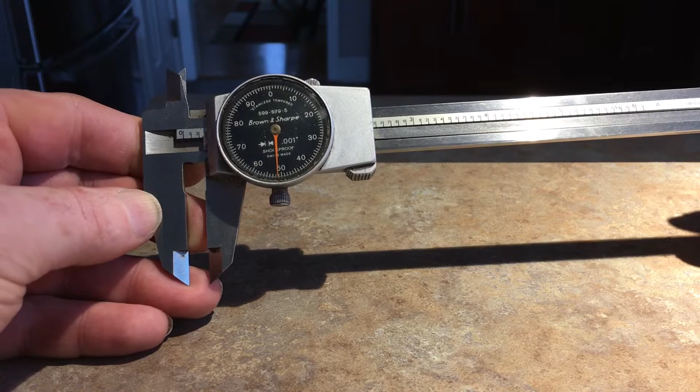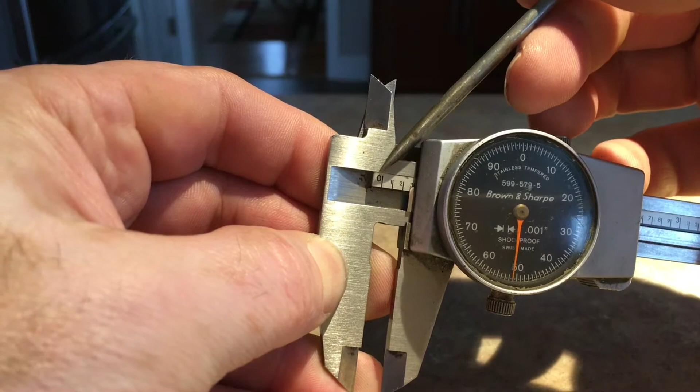This is known as a set of dial calipers, or also known as verniers. This is actually known as zero, and I'll point that out, starting at 0 all the way to 6 inches. And that's right there.

So I'm gonna open these up. They're kind of like a tape measure. There's your 1-inch mark, 2-inch mark, 3, 4-inch mark, 5, and 6.

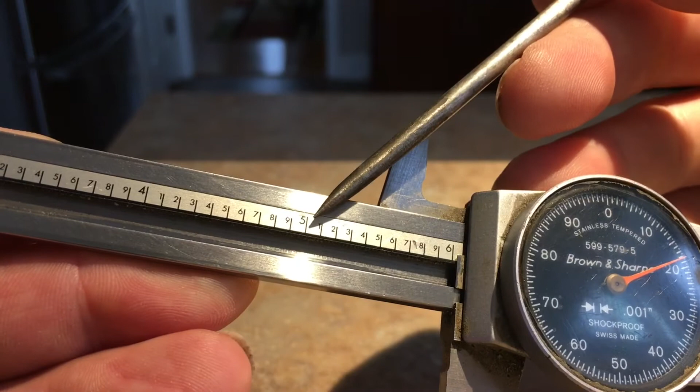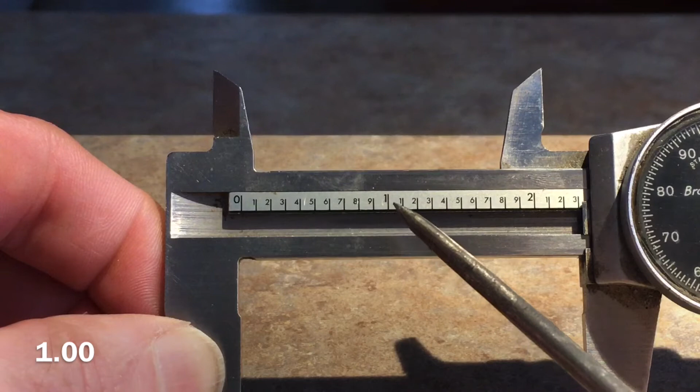The lines in between those are your 100-thousandths marks. So let me zoom in here. Starting from 0, that's 0.100, 0.200, 0.3, and so forth all the way. And then when you get to 1 inch, now you're at 1.0. So now when we go up here, we are at 1.1 inch, 1.2 inch, 1.3, and we keep going.

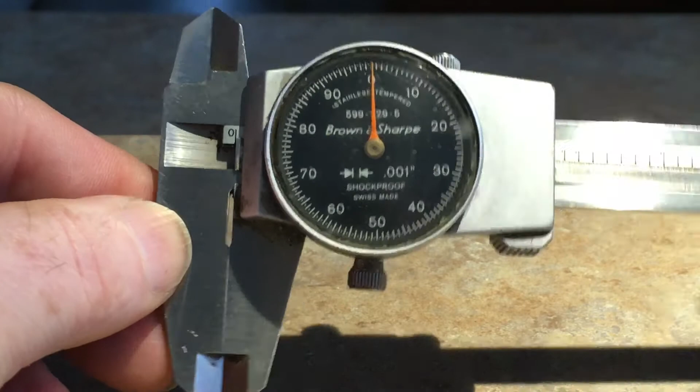This would be 2 inches, so 2.0, 2.1, 2.2, 2.3, and it just keeps going on. So what this means is when this is down to 0, well essentially you're not measuring nothing, it's just bottomed out. And every rotation of this dial is 100 thousandths.

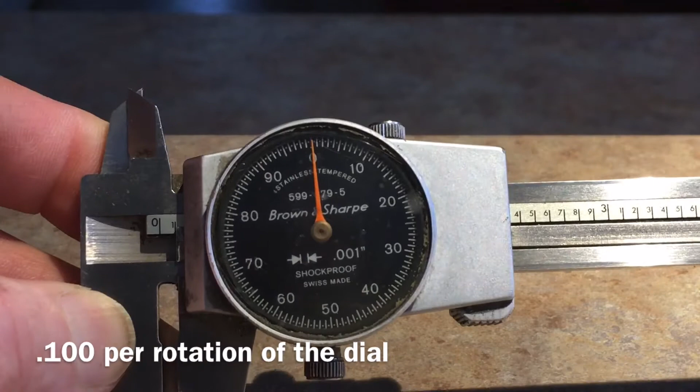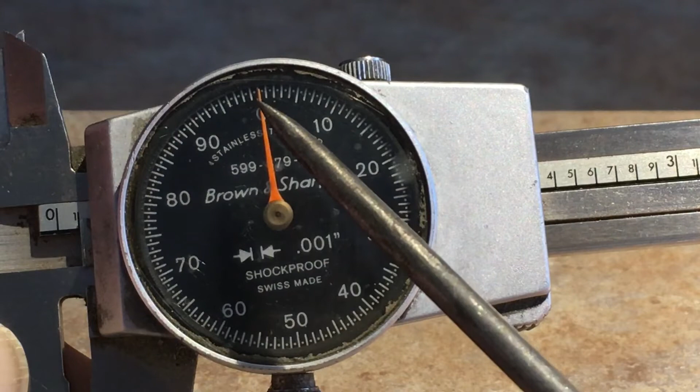Let me zoom in here. Each line that you see is 1 thousandths. So there's your first 10 lines, and then 20, 30, 40, 50, and all the way around. There's 99, and then it just starts over again. That would technically be a full 100, but you're starting over.

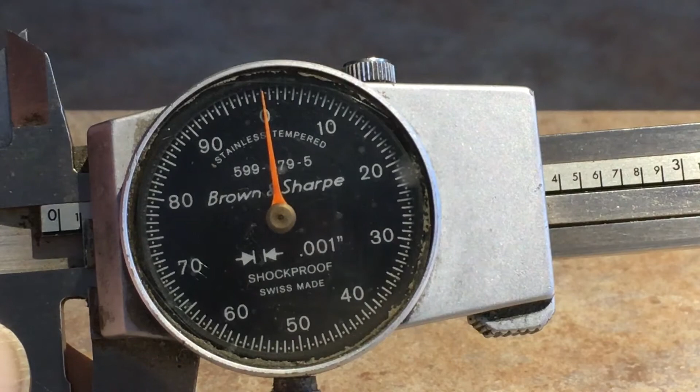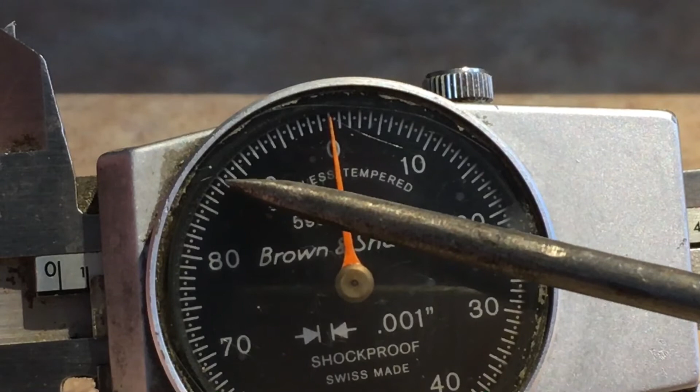And then the little dots, let me zoom in closer. I know these things are messy. Those little dots in between those lines are 1/2 thousandths, or I should say half of 1 thousandths.

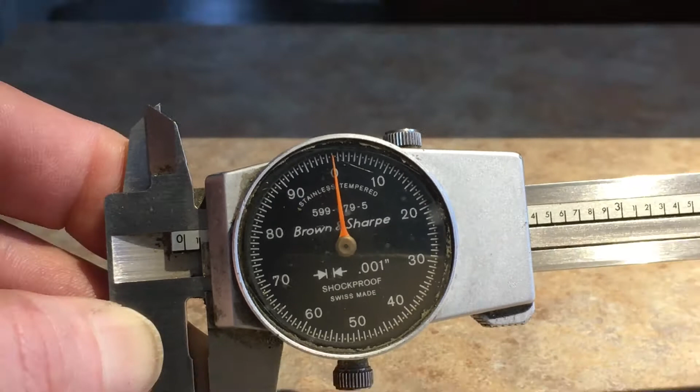Now all verniers are going to probably vary on that. My set that I own right here are probably 20 years old. And they do make some that have a little thumb wheel right here. They even make digital ones, which you can just close these up and hit the re-zero mark. I don't have a set of those, but you can probably get them pretty cheap at Harbor Freight or something.

So for each rotation of that dial, it's 100 thousandths.

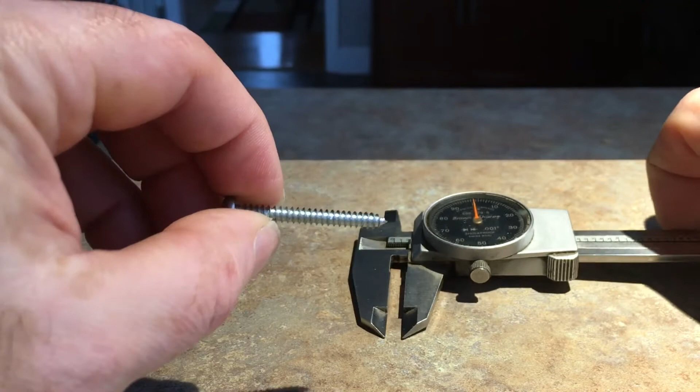So say you wanted to take a quick measurement. I'll use this screw. I recently did a couple projects around the house, and I wanted to drill a hole, just enough clearance for this to go through. It's a little tricky to use on a tape measure. So you look at it and think, well it's probably close to 3/16. And I was like, I'll just grab my verniers and measure it. Just go like this, boom, done.

And if you're a beginner, you're like, oh, how do you read that? So what this is, you can actually lock it right here. You just sit there, snug it up, and it'll stay put.

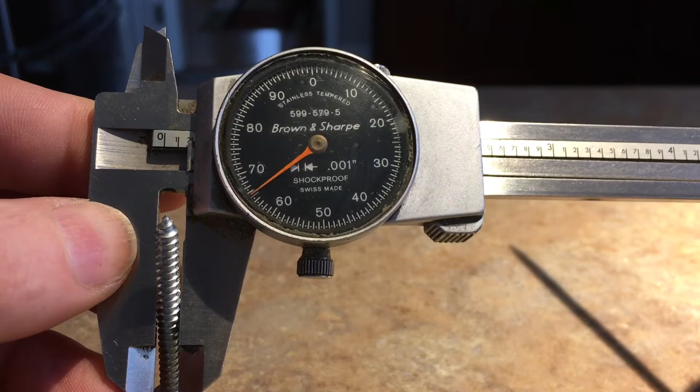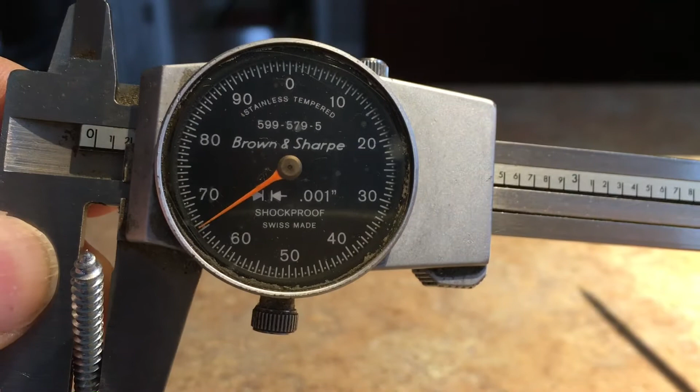Well, I'm already at the 100 mark, past that, but I'm not at 200. So you're like, okay, now we read, so we're at 100. Now we got to come up to the dial. And that's reading 65.5 thousandths. So in theory, you're almost reading at 4 decimal points, but most people would just say 165 just to call it close.

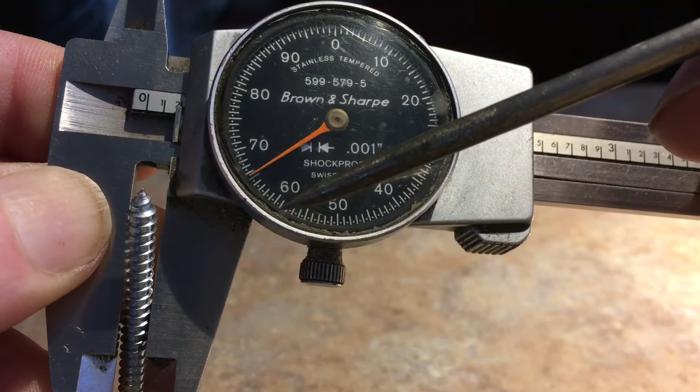Because you're adding this dial number to this down here. So 0.1, we're not at 2 yet, 0.1 plus 60, let's see here, 1, 2, 3, 4, 5.5. So...

165. So what I ended up doing, I just grabbed a drill that was like a, I can't remember what it was called, what number, but it was like a .172 drill. It was just enough to act as a clearance, and that's all I wanted. Just the bolt, I'm sorry, the screw would just slide in and do what I wanted it to do.

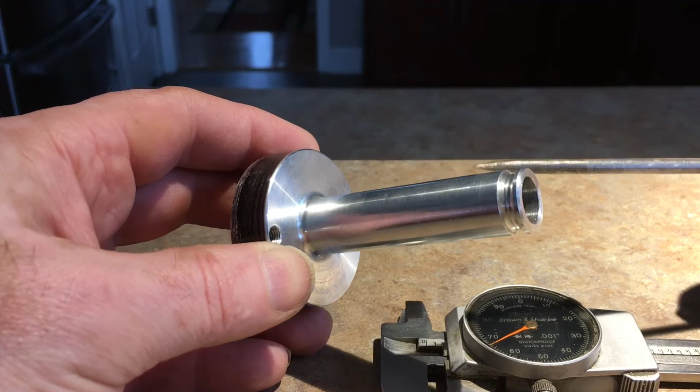Here's a piece I made a while back at my old job, and this surface here had to be plus or minus a half a thousandths.

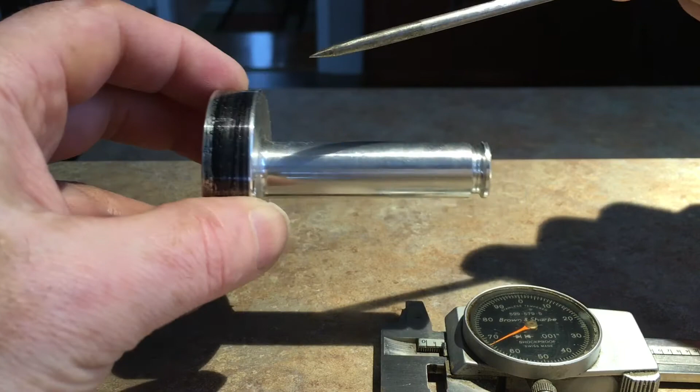So I would measure that with my micrometers. But when it came off the machine, I would just give it a super quick measurement all the way around using my verniers as far as the groove, this surface, this OD. This didn't really matter. This was plus or minus 10 thousandths. The width of the hub here, that was plus or minus 5 thousandths. And then there's an internal, I don't know if you can see it, there was an internal bore that a bushing went into.

So, say your part comes off the machine, you wipe it down, and you want to take some really quick measurements.

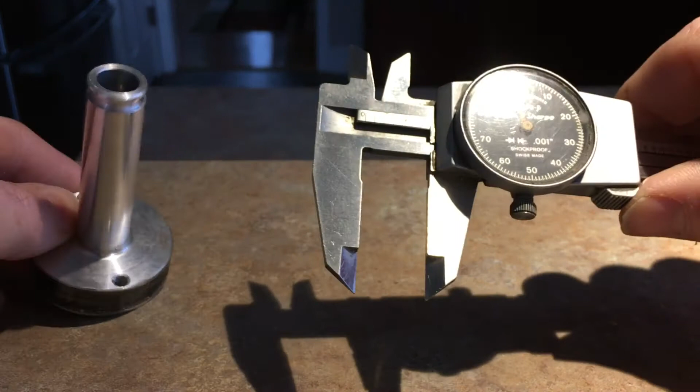This part right here is meant to get into tighter spots because it's ground. You can see that. It's got that taper so you can actually get in and measure tighter spots. Then obviously on these flats, on your verniers, is where you do all your measuring on the OD.

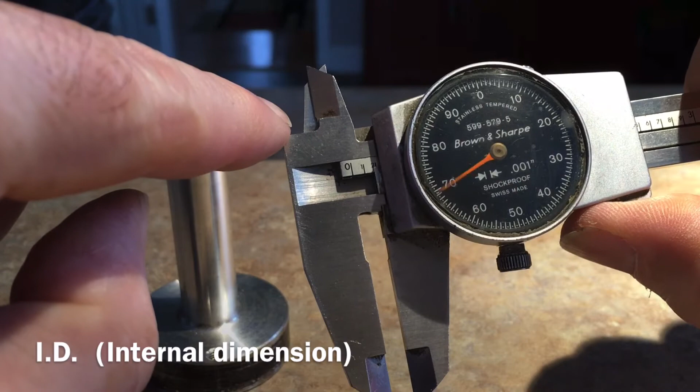This part on this side is meant for measuring internal ID dimensions. I'll show you that in a minute. And then on the very end, you can actually measure the depth of a hole this way.

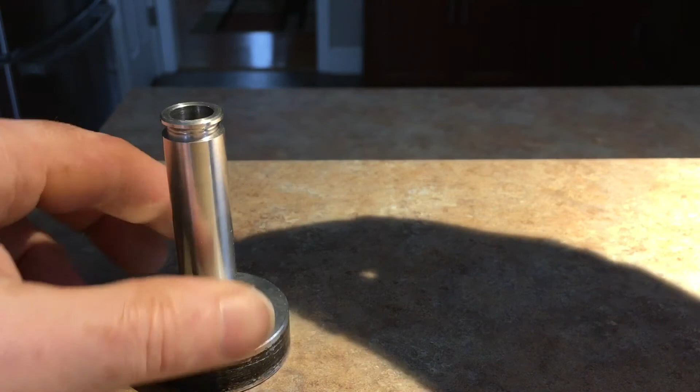So in theory, what I ended up doing was, okay, I already knew the dimensions I had to work with on all these. So I would have it come off the machine, measure that. That was almost 522. It's 521.5.

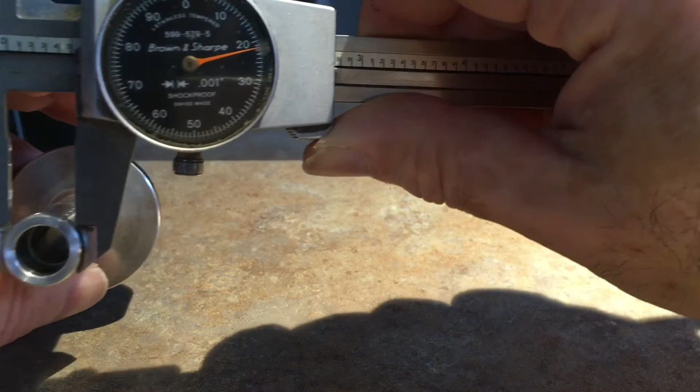I'll measure the OD here. I mean, it was super close. 625. Measured the bottom. 625. And I'm not pushing super hard. I'm just enough pressure.

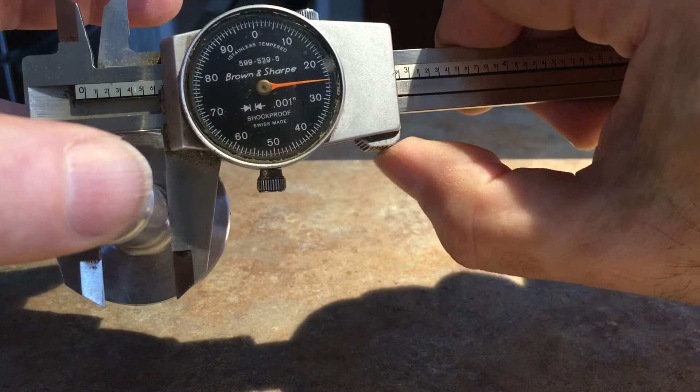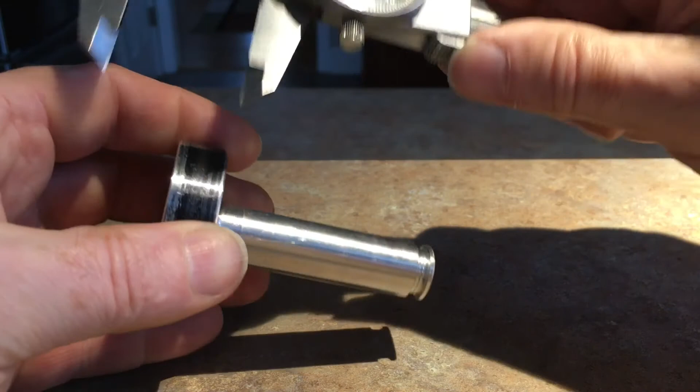It comes with practice, but it's just enough. I'm not like wailing on it with my thumb. So, and I would recheck that with my micrometers. So in the OD here, it wasn't super critical. It was 1.750 plus or minus, I believe it was 10 thousandths or something like that. So that was fine. And then over here, the hub. You can see we're 0.501, so that was within spec.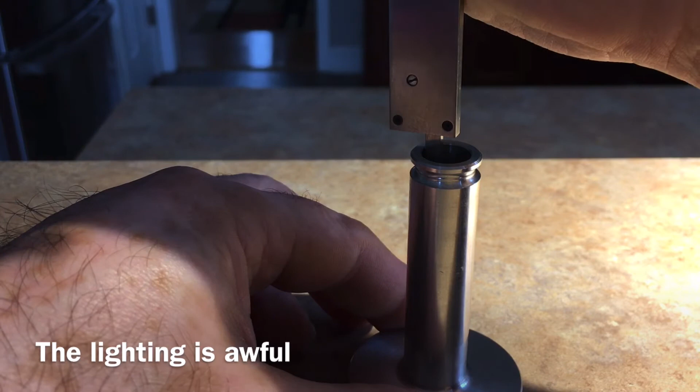Let's do an ID measurement. Let's go like this. Sorry about the lighting. My arm's in the way.

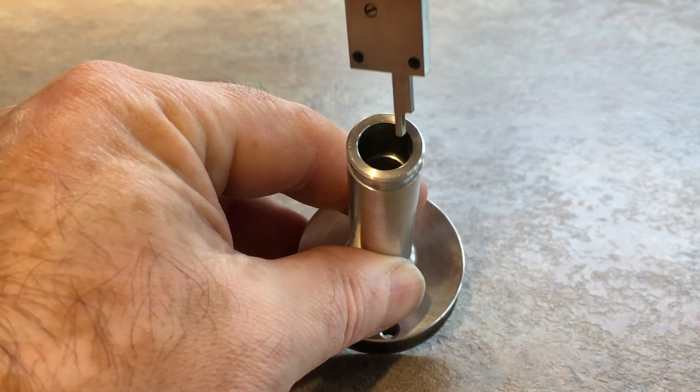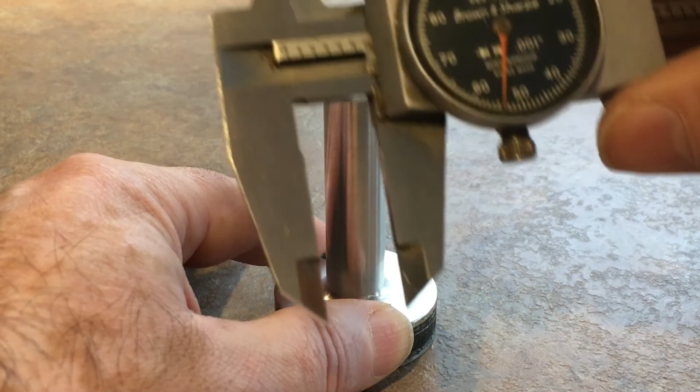Okay, everybody, I just wanted to show you a better view of measuring inside. You can see in the picture there's a little bit of a glare, but I'm trying to get as best I can. I bored this here to a certain dimension, and these verniers can actually measure it really quick. So you can actually go up against the side, come down, actually let me just put these a little further. And then you can just bring this down and get your dimension. 554.

As you can see there, you got the 5 on the dial, and you're not at 6, and then you just take your reading on your dial, which is at 54. So you got a total of 554. 554. All right, so I'll have more videos coming out on the tools I used in machining, and also I'm going to do some videos on CNC programming, because I was...